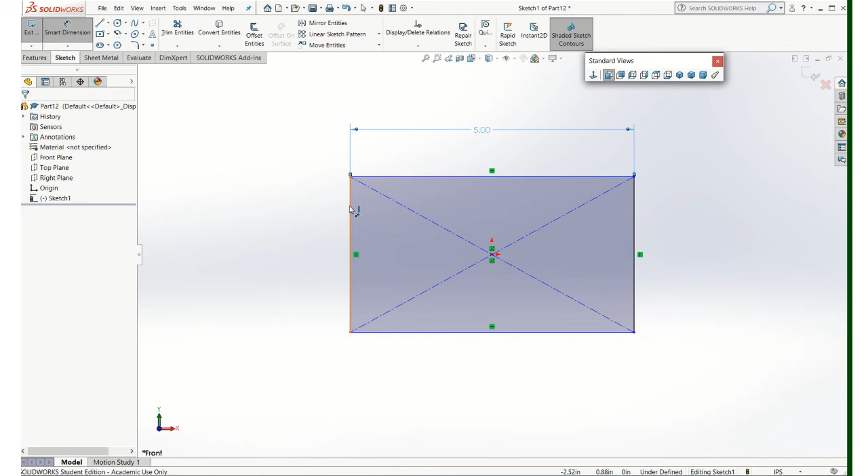So we'll start with the base. It's a 5x3 rectangle, going to be 50 thousandths thick. I'll leave my other defaults as they are.

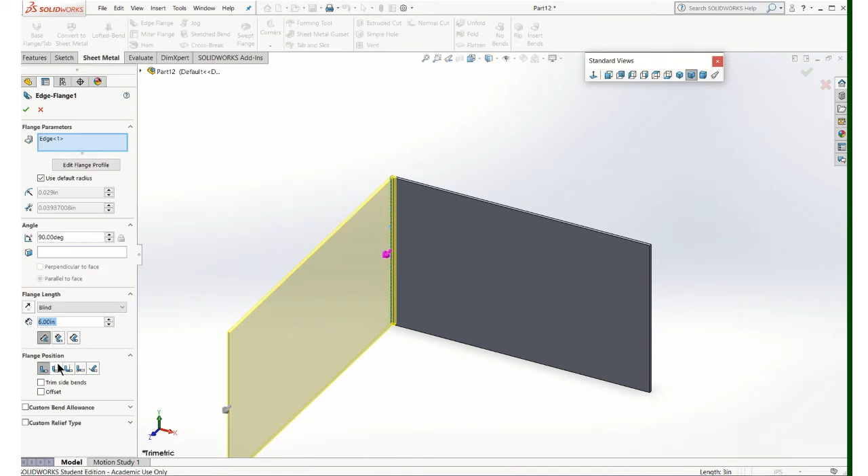Now I'll start with the flanges. I'll put one on this side over here, pull it toward me, and that will be 6 inches tall. Keep my bend radius and my other defaults, and I'll add my other edges.

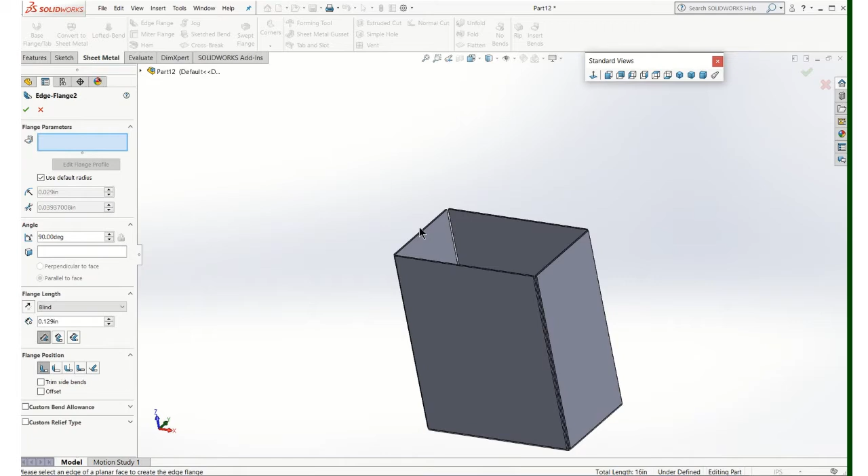And there's my box. Okay, so now I need to add some flanges here on the two sides. So go to edge flange again. Start here, go away from myself, and that's actually going to be a 2-inch flange.

And there'll be one over here that's also 2 inches. And now we're going to change this. We're going to make these narrow.

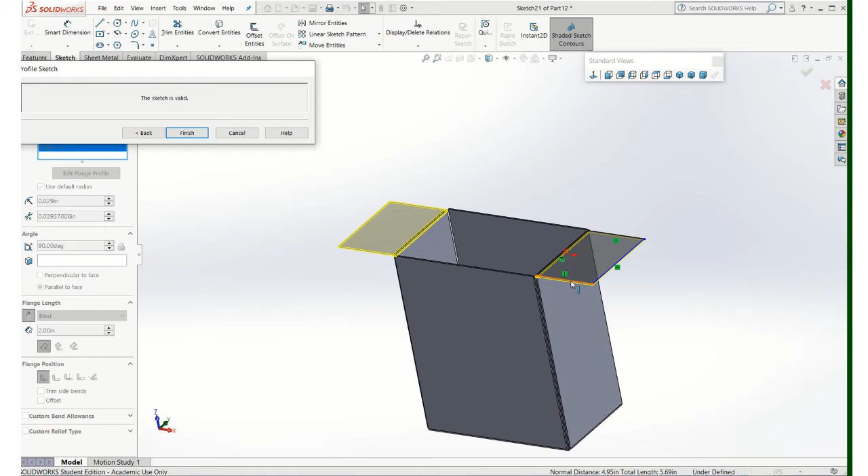So go to edit the flange profile, and if you click on the edge and drag it, go to your dimension tool, and we'll set the actual sizes here. Oops, let's try that again. I don't know what, I got too many inputs going on here.

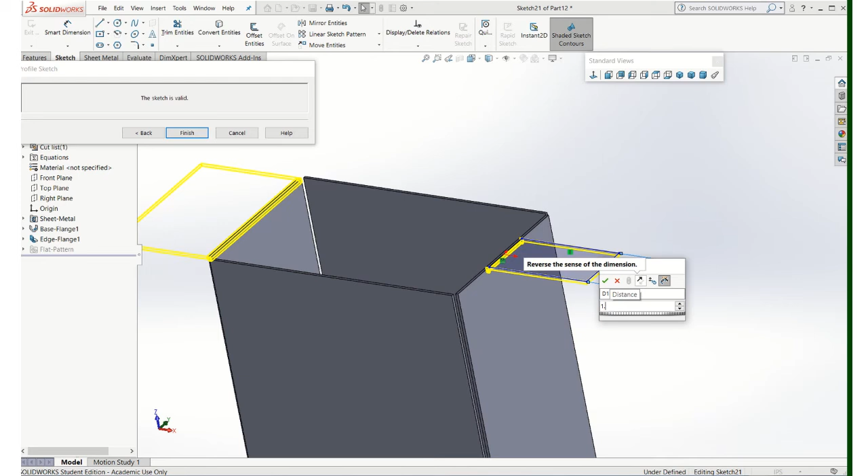There we go. That's 1.75. And I'll go this far, outside edge to there, and that's 0.625. That's going to center it on there.

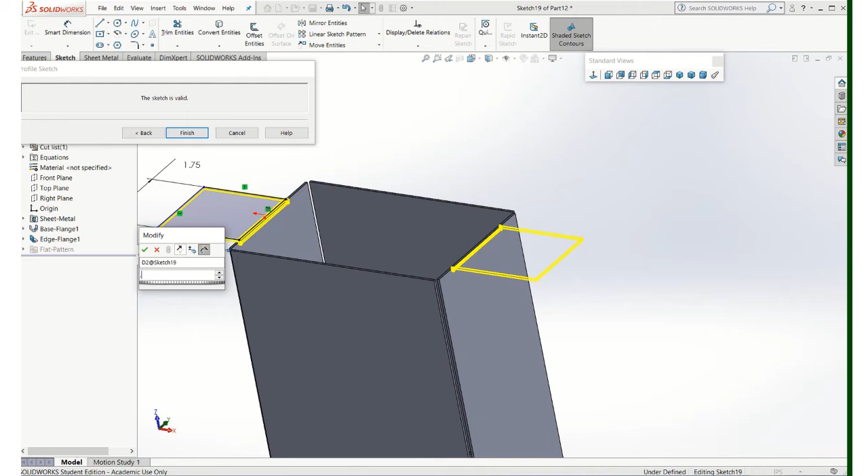So go back, because I want to do the same thing to this first one. So edge, narrow it down, put my dimension on there for the width, and also my dimension for location. Again, that's 0.625. Let's go back and see, that looks good.

So finish that, and notice how what it does is it cuts that so that it allows you to bend it without tearing the metal.

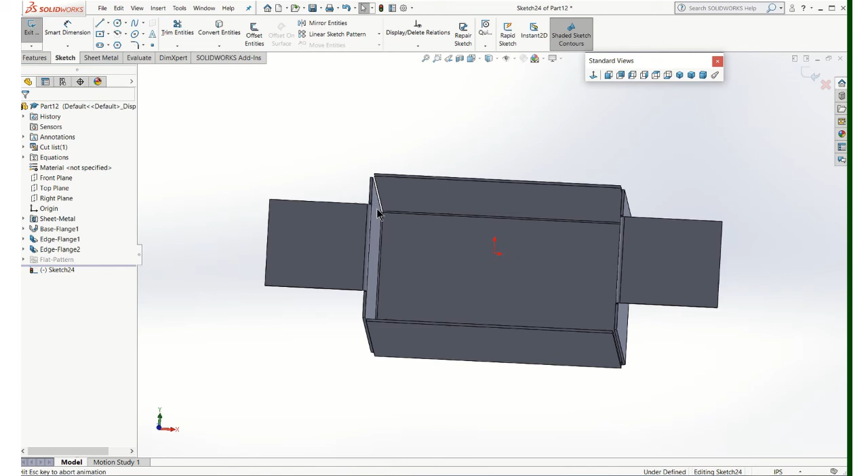I do need to add some holes. Let's just use our sketch tool to add some mounting holes to these flanges here, and I'll need to dimension those.

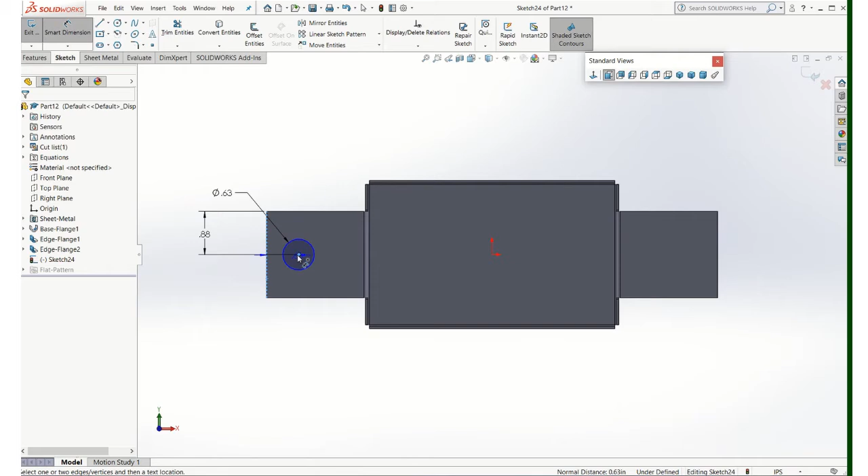I'll just use my cut extrude to cut that hole in there. You do the same thing on the other side. Maybe an easy way would just be to put a mid plane on there and mirror it, I think.

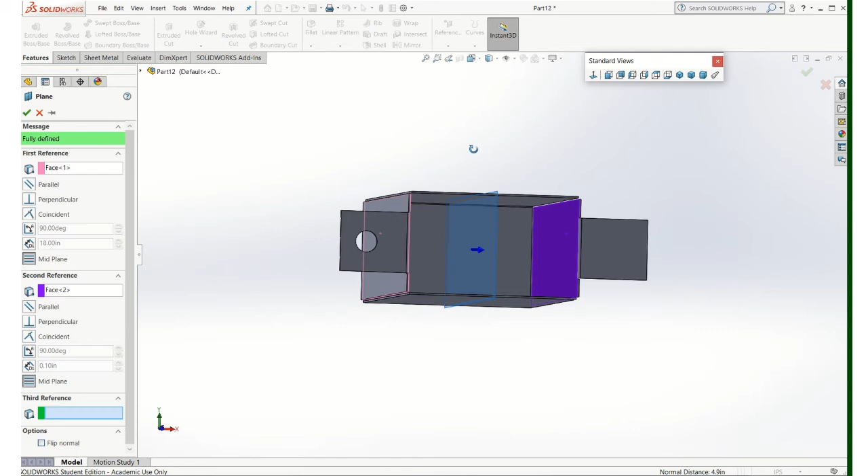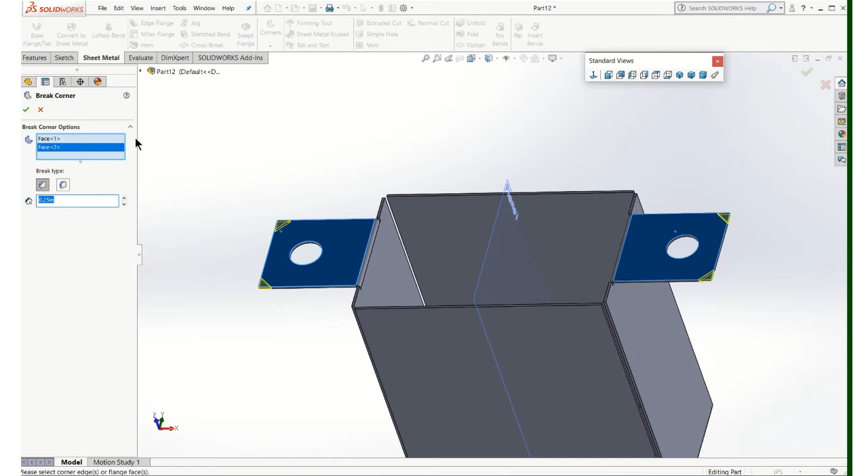Okay, we got chamfers that we need to put on these tabs, so go to sheet metal, and we'll use this corner, break corner. It's going to be a chamfer of 0.25, and if you just click on the face of those, it'll find the corners and chamfer them. Takes care of that. Let's turn that plane off.

And then we have some holes that go in the side of this, so again, just use your sketch tool. And those are 1.875, for both of those.

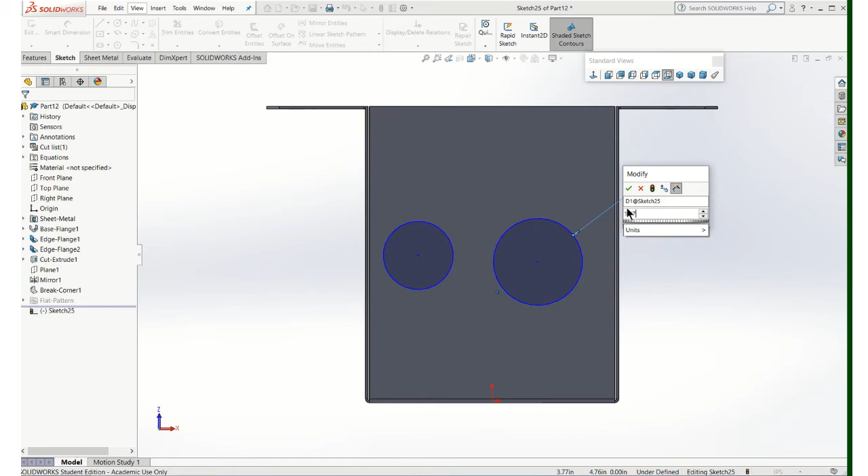And dimension locations for the holes, and I'm doing everything off the outside edges. Oops, missed that height on that one.

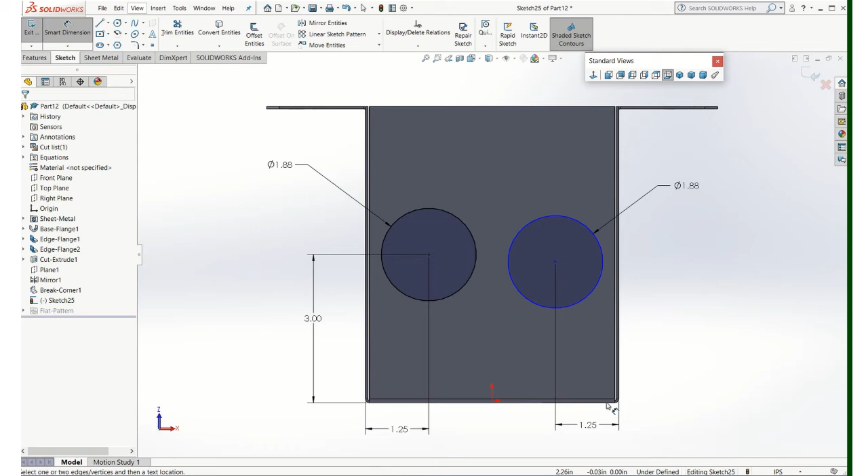Okay, finish the sketch. And I'll use my extrude cut, and this time I'm going to go all the way through because the holes go through both sides of the box. So there's our box. Let me save that.

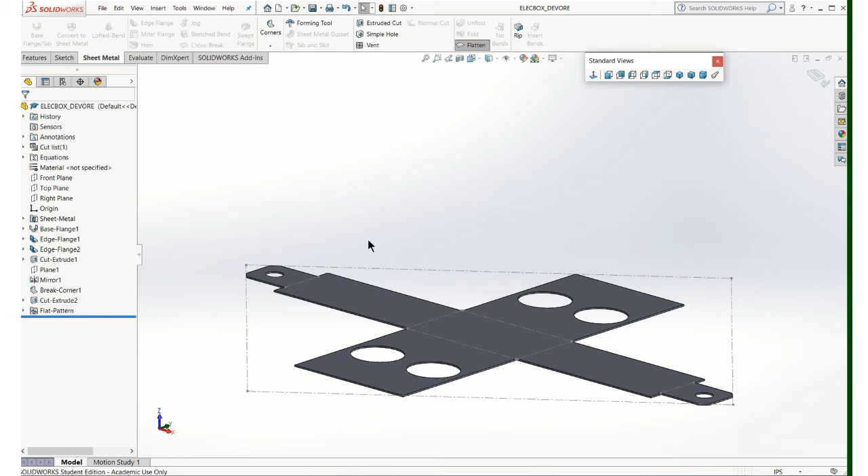And before we leave here, let's look at our flat pattern. Go to sheet metal, we'll look at the flat pattern, see what that looks like.

No, let's put it on a drawing sheet. Drawing. We're going to have to make 2 sheets for this. So on one sheet we'll put, not a good view. One sheet we'll put the orthographics and an ISO view.

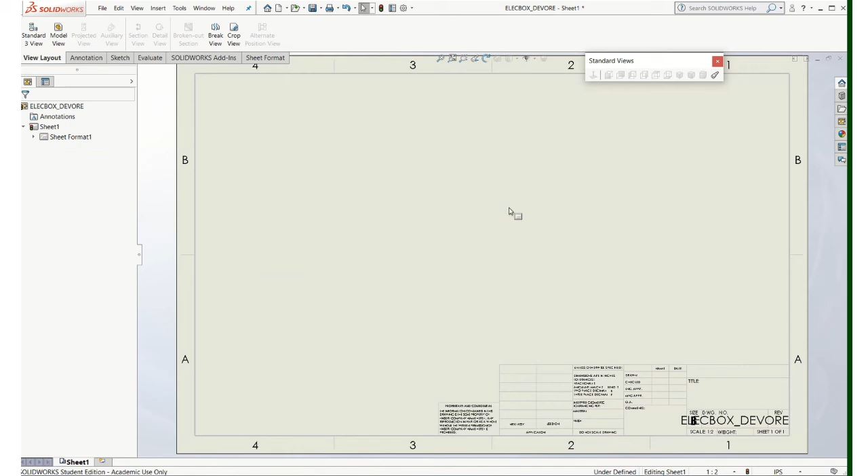And the other sheet we'll put the flat pattern. So that's good, yeah, there's a good front view. Top view, right side, and ISO. And I do want you to dimension this, and also don't forget to put a note on there about the material.

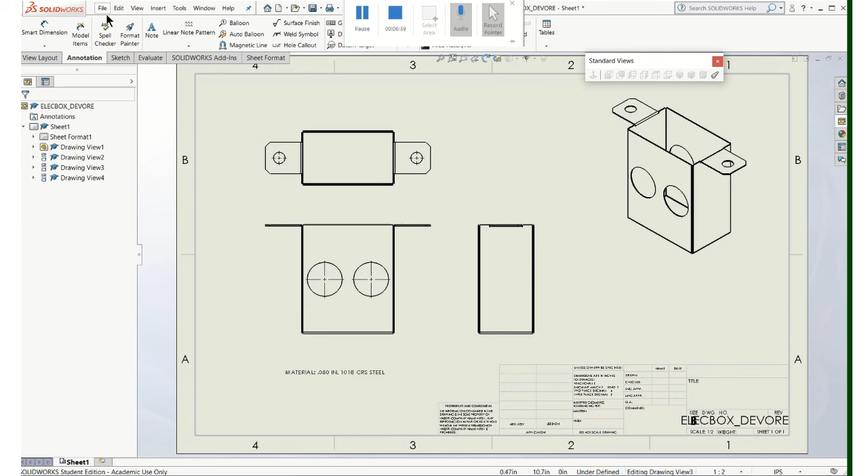So that will need to be dimensioned. And I'm going to make a new sheet, a second drawing sheet for that. And this one I'll put the flat pattern on. And there's our flat pattern.

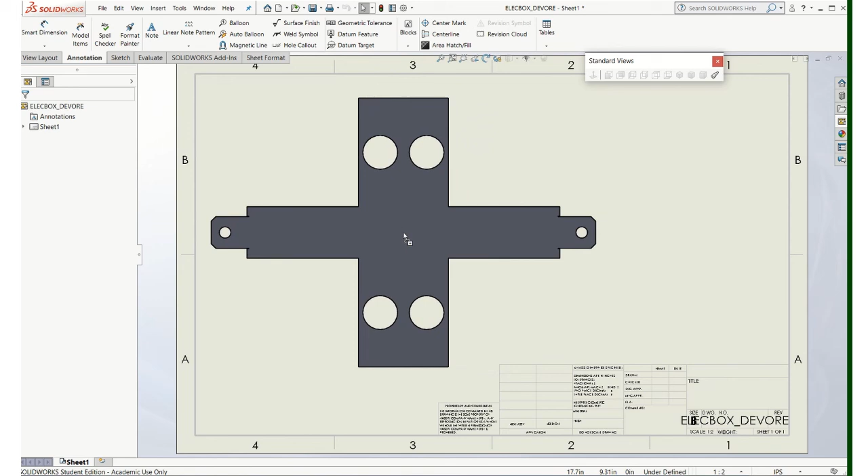And that's going to require some overall dimensions. Now if it comes in and it's in the wrong orientation, you can rotate it, or you can scale it down.

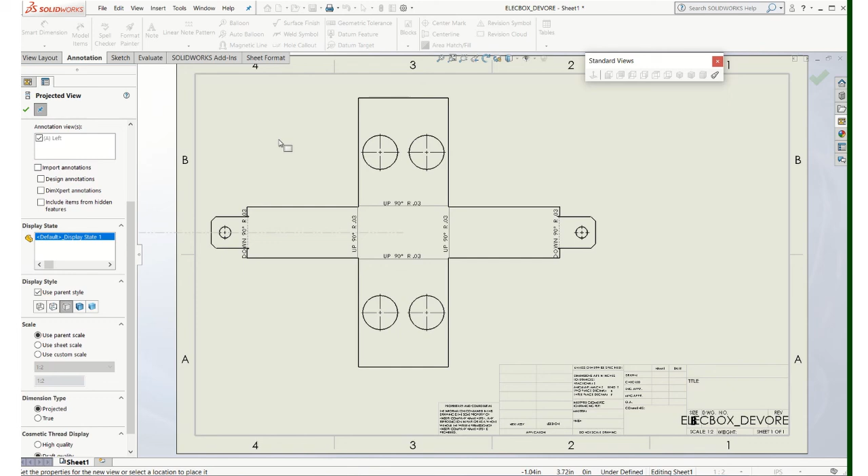Let's also put an ISO view. It's kind of nice to see the ISO view on there with the pattern. And that fits nicely. So put some overall dimensions on that one. Let's fill out the title block. And then you'll have those 2 sheets to turn in. That's it.